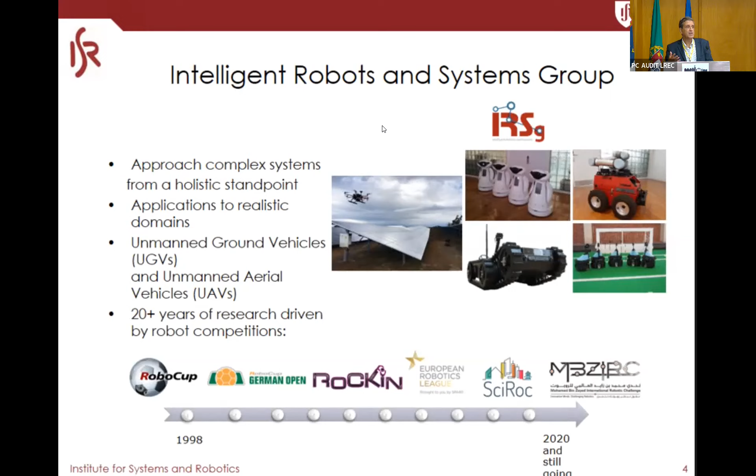Okay, so a brief motivation. Why cooperative heterogeneous robot teams? Well, if we mix UGVs, unmanned ground vehicles, and UAVs, unmanned aerial vehicles, we can bring advantages and cover the disadvantages of each. The UAVs have limited energy, but particularly for surveillance operations, which is what we're talking about here, they can have a much larger overview of the scene and fly around. On the other hand, the UGVs can take closer, more detailed views of things. They have much larger autonomy, and in fact they can even help the UAVs keep their autonomy by recharging them, which is one of the ideas we have been developing.

Also, another thing we have been pursuing is to endow particularly the UGVs with multi-purpose abilities. The idea is that they should be quickly changed in terms of hardware, take advantage of a lot of the software and also of the hardware, and apply them to completely different things, which is hopefully what I'll convince you of today with my presentation.

The competitions, I said that already, so I won't take too long on this slide, but particularly what I'd like to emphasize is that they push the state of the art in particular areas by bringing, instead of having people developing work in particular cases and advancing fundamental research separately, here it's like another paradigm. You go to solve a problem common to everyone, and you compare the different approaches, the pros and cons in several different aspects.

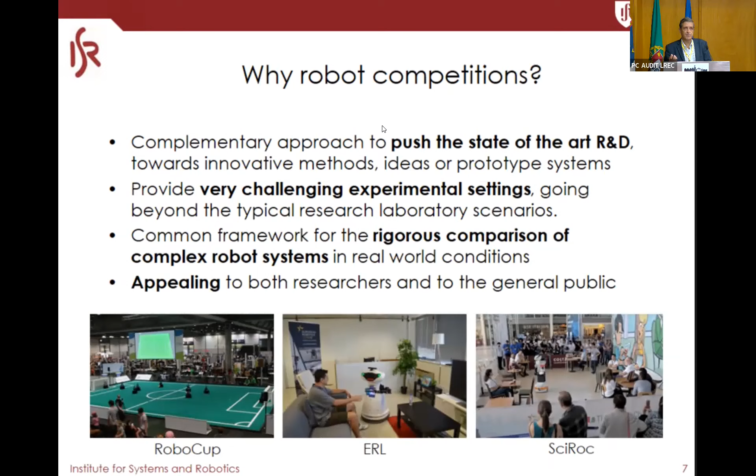And usually, if they are well done, they challenge you to do better every year, and they have very challenging experimental settings which try to be realistic. I'm showing several of them. On the left, it's the typical football field of RoboCup. In the middle, it's an apartment we have at ISR where the robots can evolve and interact with people. And on the right, it's the project finishing as we speak, the European project that, among others, had competitions in big urban areas, shopping centers, museums, where the robots interacted with people who were not engineers or roboticists. So it brings much more realistic challenges.

Speaking of challenges, let me tell you about the two challenges of MBZIRC 2020 that we faced, because then I'll show you our approach, how we tackled them, and how we used the multipurpose mobile manipulator for that. We were teaming with the University of Seville and CATEC, a tech transfer center they have in Seville. They were in charge of the UAVs, we were in charge of the UGVs. Some of these challenges involved the need to cooperate. I'll be showing only our part, but there were parts the UAVs also did.

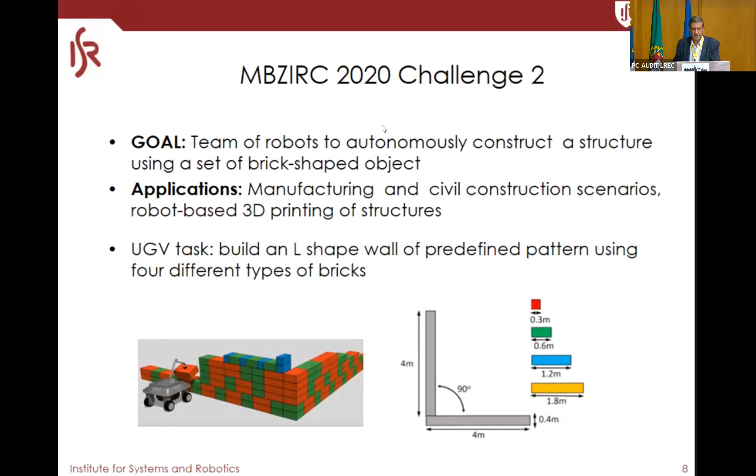In challenge 2, the idea was to build a structure like a wall with a set of bricks of different colors and sizes, and the robots would receive the pattern that had to be built immediately before starting their run. They had to go pick up bricks from piles for each color and size, then put them one by one in the wall according to the pattern. The UGVs were supposed to build part of it, and the UAVs could also help distribute things. No team could do many bricks, so this was really challenging. We did not perform as well in this challenge as in the other, but we could already develop some interesting things which I want to show you.

Our approach consists of putting together navigation, object perception, and object manipulation. You see some pictures of the simulator we developed, then I'll show you real stuff, but these illustrate well what's going on. You see piles of bricks with different colors and sizes. The first thing was to decompose the wall pattern into a sequence of bricks so that the system could run the desired sequence. So we did that, we had that decomposition.

Then we had to do navigation collision-free, because even though there aren't people, there are bricks falling on the ground, even from the previous competitors, which we have to avoid. And of course, then detect the bricks, localize with respect to them, align with them, pick them up, and take them to the wall.

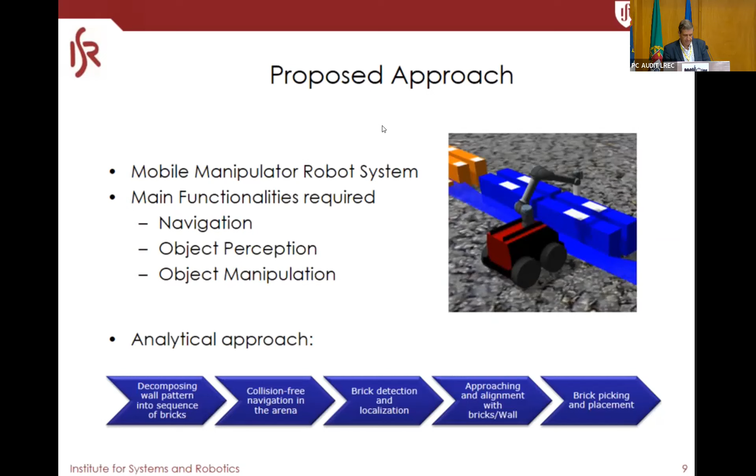Find the place according to the prescribed pattern, and place them there. So it's a pick and place operation, a bit more sophisticated. In challenge 3, what the teams had to do was everything autonomous, no teleoperation, robots are fully autonomous.

To extinguish simulated fires in a building with a tower and a less tall building on the right. They had to find these fires, quite realistic but not real, fortunately, and extinguish them. In fact, to extinguish them they really had to have water, pumps and hoses on board, because there would be meters to measure how much water had been poured in.

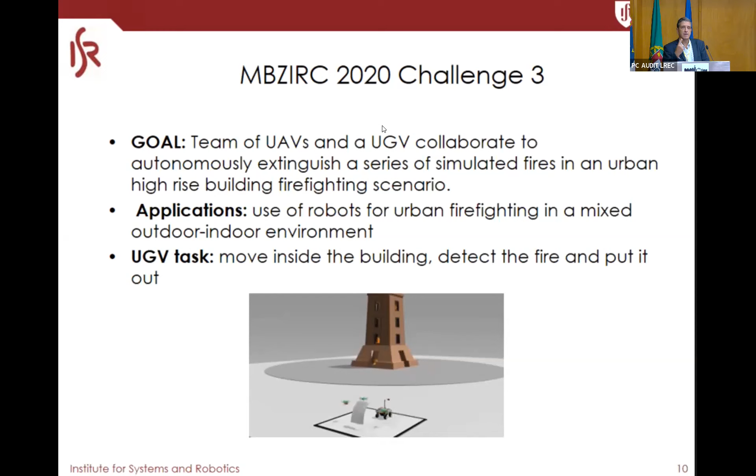To simulate that we were extinguishing the fire. In the particular case of the UGV, you see that tower, the real one, but there's a building on the right which is not there, and the UGV had to go inside it. While the other fires were in the tower, in the windows and inside, in that case all of them were inside the building. There were two possible spots, usually only one was on fire, and we had to find the right one.

Here we had more functionalities, but you can see the mobile manipulator we were using, which I will describe in a few slides, is the same with few modifications. And essentially we have again navigation.

Navigation implies the robot has to localize, but in this case it has to do a part outdoors of the building and another part indoors, so we had to switch.

Then things more specific to the application, like fire detection, aligning with the fire, calculating the distance for the water shooting, doing the water shooting, and planning the motion of the manipulator and of the mobile robot. So again, collision-free navigation, but now with a switch from outdoors to indoors. Then collision-free indoor waypoint navigation, which uses a different method. We will get there. Fire detection and putting out the fire.

So let's focus on the mobile manipulator used for these two challenges, and on particular aspects of it. This is based on an actually quite old mobile robot that we had acquired about 20 years ago from iRobot. Together with a Portuguese SME, a spin-off of ours called IDmind, we modified it thoroughly. So the only things left were the motors, the wheels, and the chassis.

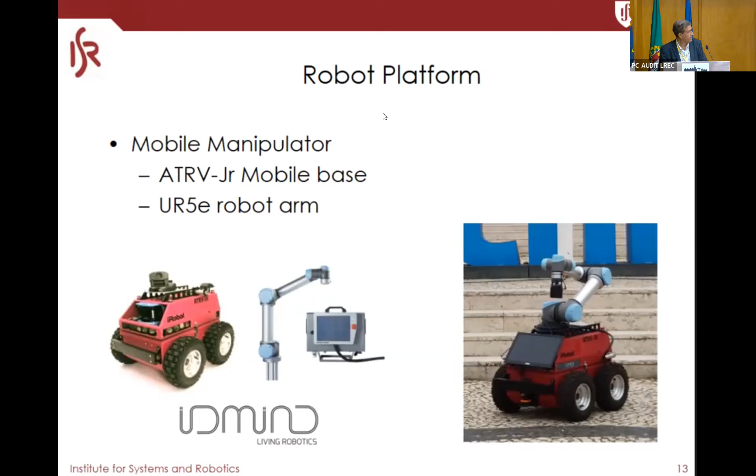I mean, located on top of a table. Here it had to be on top of the robot, and it had to be powered not by AC power but by the batteries of the robot. This was also done by IDmind, and it works flawlessly so far, which is very good.

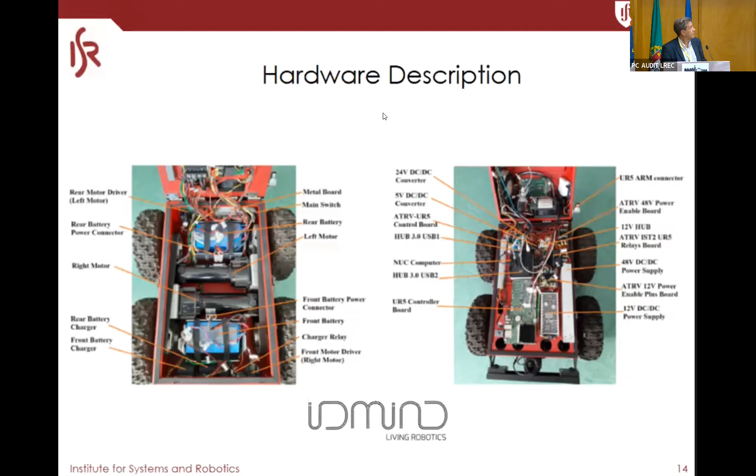I won't go into details, but you can get an idea of what was going on inside the robot. You have a lower part with batteries, the motors, the boards for the motors, and then there's a door that closes on top of that, and you see the rest of the electronics, which includes a CPU, a NUC computer, and several things regarding power conversion and the connection to the manipulator.

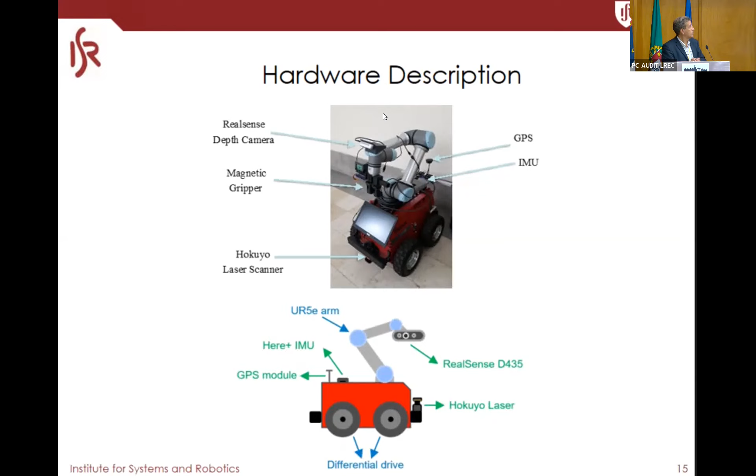Then it has on the front a Hokuyo laser scanner that does scans to determine the presence of obstacles, but also helps in navigation, as we will see. In this particular case, it has a magnetic gripper, though this is one of the things that changes from challenge 2 to 3. Here the magnetic gripper was used to pick up the bricks, because the bricks had a metallic plate that the robot could pick using a magnetic gripper.

Functionally speaking, how do we put all our functionalities together? Essentially, there are 4 modules. Perception, that is very common in robots, as many of you know, others maybe don't, so I'm going into some detail here.

The perception module gets the images from the RGBD camera and the scans from the laser, the 2D LiDAR, and processes them to provide information to the other modules. One important piece of information is the detection of obstacles to avoid them.

Remember I said we were doing collision-free navigation. The other one is also the environment scan, so that, for instance, we can compare what we see with the scan, like the distance to the different walls here, with a map of this room, and this way determine our localization. And also the events that go to the planner, because the planner does motion planning for the arm and for the mobile robot.

But it also does a part which is not planning anymore. It's executing a plan which is going through the states of a state machine to go through different parts of the task. I will show you that.

The navigation module, of course, is quite important. It is the one that moves the vehicle around. So it gets all this information plus GPS and IMU, fuses everything, and we will see, particularly in the final part of the other application, that we have been doing some new stuff on top of the more traditional GPS plus IMU plus odometry, and determines the velocities that go to the wheels of the robot.

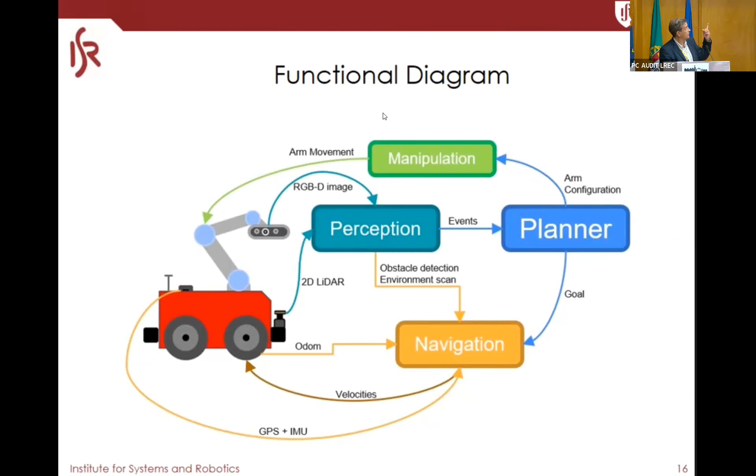Oh, I forgot, the planner does the motion planning for the wheels and for the manipulator, which then determines the motion of the arm, of course.

So here's the state machine I was talking about, which is pretty simple, but it's important to make it work in real time and with all the information we have from the sensors. So essentially for this challenge, if you start there in the begin block, you go down, go to waypoint pile.

And then you go to the left, align with the pile of bricks, pick a brick, the one that you want, of course. So each of those boxes has a lot of processing inside.

Go to the waypoint, which is close to the wall, align with the wall, and place the brick. Again, the waypoint is not predetermined. It has to be determined from the sequence of the pattern of the bricks, and so it changes from iteration to iteration.

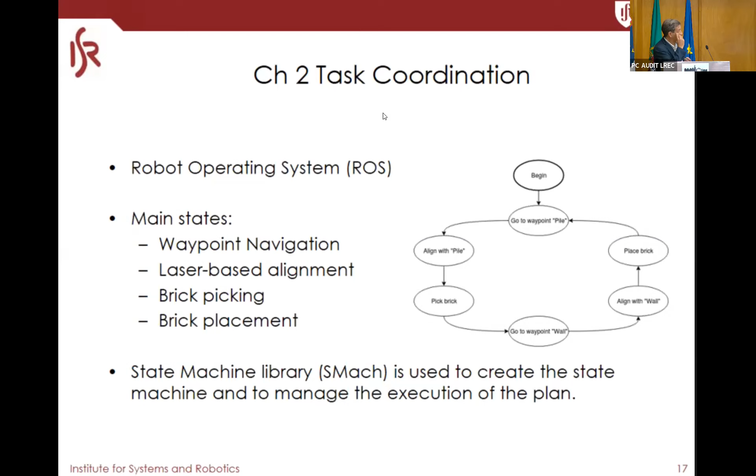So it goes again to the waypoint and continues. We have used the ROS state machine library SMACH to create the state machine and to manage the execution of the plan.

Okay, so focusing on some of the subsystems. This one here, the images are 3 times the actual velocity. This one here shows experiments we did at the campus of IST. We took advantage of the pattern, which allows us to visually check if the robot is following what we want, which, as you probably can guess, is those black lines that it is currently going through.

And what we were using was GPS, fusing it with the inertial measurement unit and with the wheel encoders. And at some point, not in these experiments, but later on, we also used real-time kinematics GPS, RTK GPS, which improves the precision of the GPS. Well, this is a pretty open environment, which makes the life of GPS easier.

And we used an extended Kalman filter to fuse all this information after doing transformation from the coordinates that the GPS gives us, which are latitude, longitude and altitude, into the frame that we were using locally. On the left, you can see evolving over time, together with what's going on in the different images, the estimated path of the robot with the ellipses of uncertainty associated to it.

To be honest, I don't remember off the top of my mind all of those over there, but it's very clear that the blue one is just the GPS data. And then there are different methods where we keep adding odometry and IMU, and you can see, for instance, that there's one which is completely misaligned, which is based only on odometry.

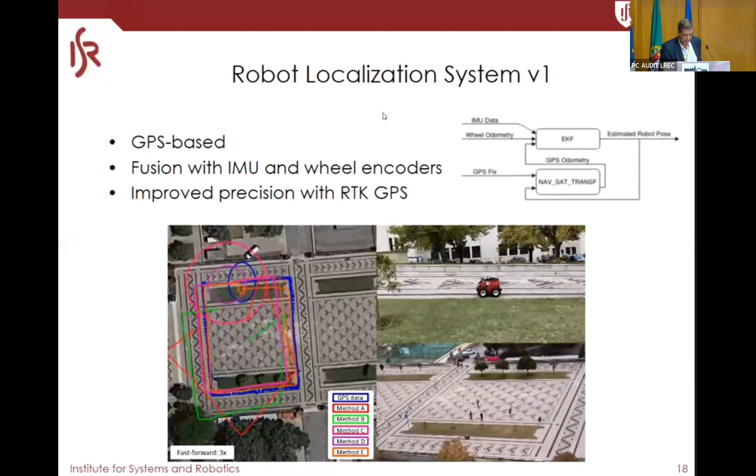So we use this in Abu Dhabi for challenge 2. You can see on the left pictures of the simulator that we were using in Gazebo, showing the cost maps that show the distance to the obstacles so that we avoid them.

And you see the robot moving from the home position. It avoids an obstacle which has fallen from the brick over there quite nicely. It does it a little bit slower to be careful, and then goes ahead. Then, in the final video, it goes to the other side to pick up the bricks.

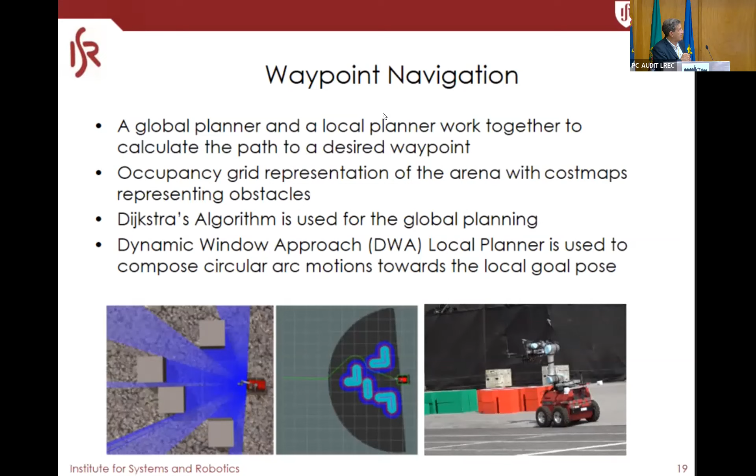Just for the record, we use the global planning method, which is the Dijkstra algorithm, which determines the path, and the dynamic window approach for the local planner, which basically determines straight lines and circular arc motions towards the local goal pose, taking into account the available velocities and the free space in front of the robot.

One thing that we developed on purpose for this, which was quite useful even later on for other applications, was to use the laser to get the robot aligning with the bricks. This is very important because the robot needs to align with the brick so that the camera, the real sense camera on top of the manipulator, can see the brick and determine where it should go to catch it.

There are always small differences from run to run. Essentially, there's a line extraction you see up there from the laser scanner. The robot moves so that it gets at a given distance from the brick and aligned with it. So essentially, it is computing the brick's relative pose, and then it aligns with the brick based on a closed loop controller that uses that information. Afterwards it picks it up, but we have not gotten there yet.

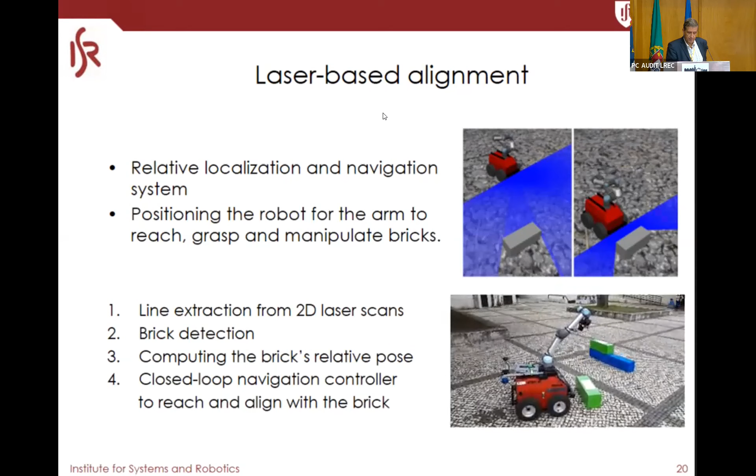And that's the part here now. These are still experiments that we did at IST. I pressed the button because there's a video that should run.

So here we use, as I said, vision. You can see on the right several images which were processed. It is relatively simple because these are just single colored bricks with dimensions that we know a priori. The problem is when we go outside, because there are fluctuations of light, and this causes trouble.

So what you see there is the UGV doing, repeated several times, the operation of finding the place where it should put the brick, which is to the right from this viewpoint, to the right of the red brick and on top of the blue brick. It uses the magnetic gripper to pick up the brick, which makes its life much easier.

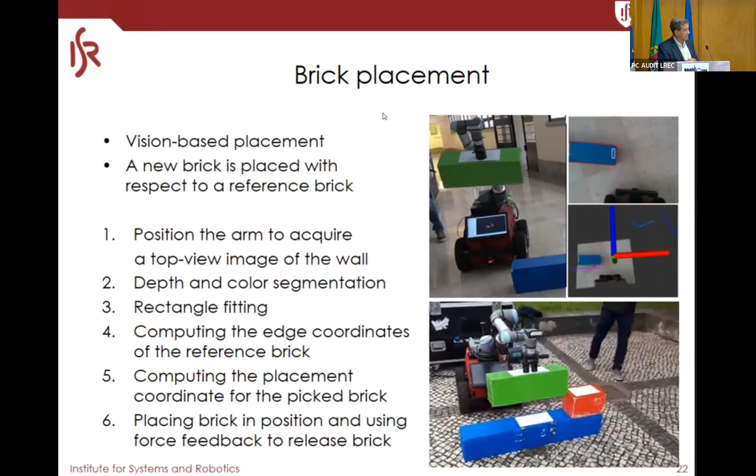But it has all this processing of vision, including edge computation, to know exactly where it should go and pick up the brick, which is very important, particularly for big bricks, because then, as you can see, they can shake a little, they can shake a lot, and fall.

Yeah, we did a lot of simulations. I'm not going to go into too much detail on those; I prefer to show the real stuff. But just for you to see, this is very important to pre-develop the system and at least make sure that it is working from a logical viewpoint.

So you see here the robot doing all the operations: going to the brick, aligning, picking up the brick, going to the other brick where it has to put it on top, aligning, and now putting it there. This was working in simulation, and in reality, it also was doing this.

You can see here, still on our campus, the robot picking up a brick. It is almost aligned already with the others, but still it has to do some alignment with the place where it is going to put it, and then it puts it there.

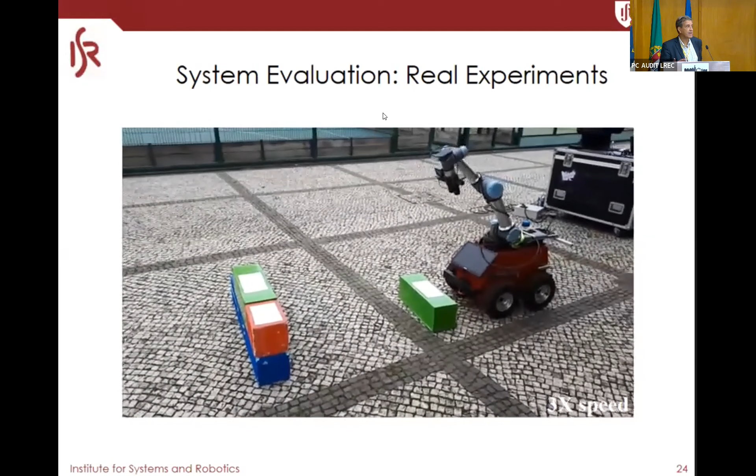This involves several things which are very important in a robotic system, and I wanted to emphasize that. You have to do each of these operations, you have to put them together, you have to react to events, and even in some cases, if there's a failure, react and try again or do something else. All of this should be part of the system.

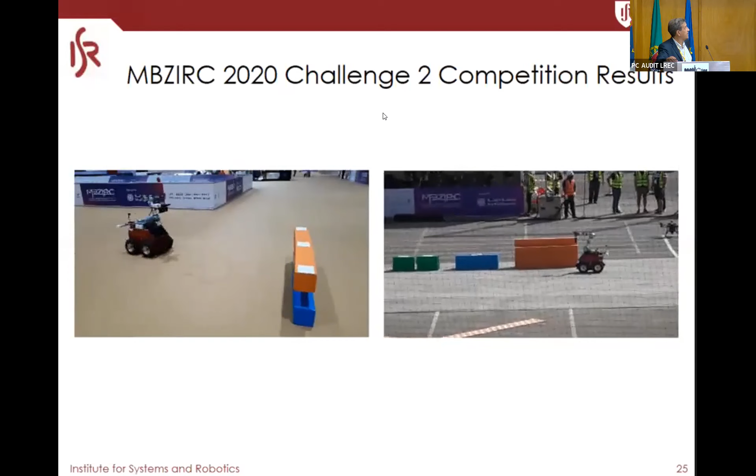We did this also in Abu Dhabi. So this is indoors, a much larger space and a much larger brick.

And then the place where it had to be put is hidden now, but it's on the left there. And on the right, you can see it in the real scene. I'm not sure if it shows there, it will show later.

We had troubles in the real thing because of what I said before. The light was, we could not train it before, and the light there was creating troubles because it could pick up the brick, but not so well like here, not in the middle. And as you will see here or later, then the brick falls because of that.

So that was a thing that was not successful. There are failures in robot systems. But here, as you can see, it could do it pretty well. So the problem was a perception problem.

Well, yeah, exactly.

Okay, challenge 3, other systems, other types of composing them. Particularly here, what was somehow more interesting was the fact that we had to mix outdoor and indoor navigation.

And so that map you see there was built using a SLAM algorithm and shows an external part and an internal part. Outdoors, we could use GPS, IMU as before, and odometry. Indoors, we could use a map, and first of all, we could not use GPS, but the map was also very reliable. We were very used to doing that in other applications, as I showed you in the domestic and hospital environments. And so we did that.

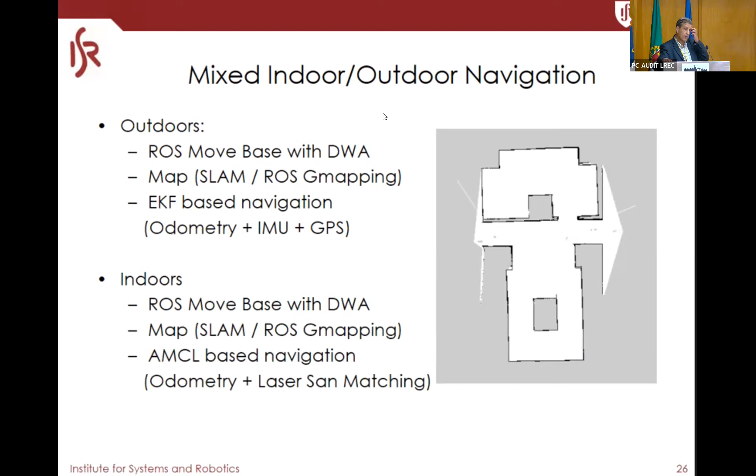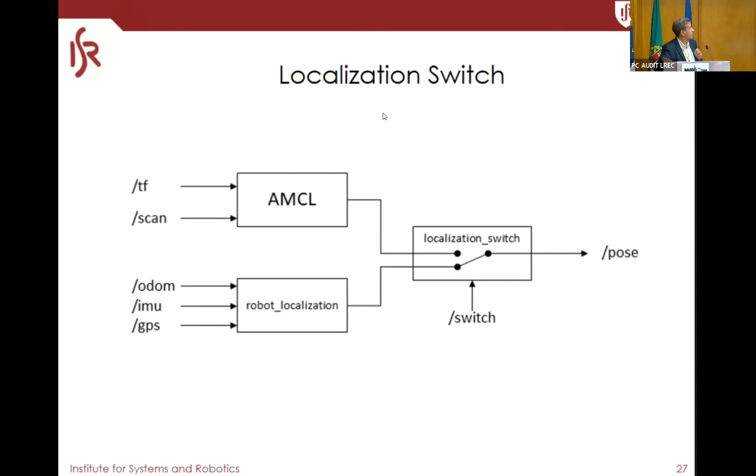But of course, this poses a problem, which is when you move from one environment to the other, you have to make sure you detect that so that you switch the localization. Then this switch provides the pose either from adaptive Monte Carlo localization, AMCL, or from this other package, robot localization, which is based on a Kalman filter and fuses odometry, IMU, and GPS.

Then particular things of this challenge. We had to do a fire detector, and we used a very popular machine learning algorithm, which is Tiny YOLO, using an RGB image and also a thermal camera, because there were two points.

One was the simulated fire. That one is the type of fire that was used in Abu Dhabi. We bought one and were training it in our environment. In fact, the algorithm was trained with real fires and with this type of simulated fire. And so it worked well because the fire looks very realistic to the computer, to the machine as well.

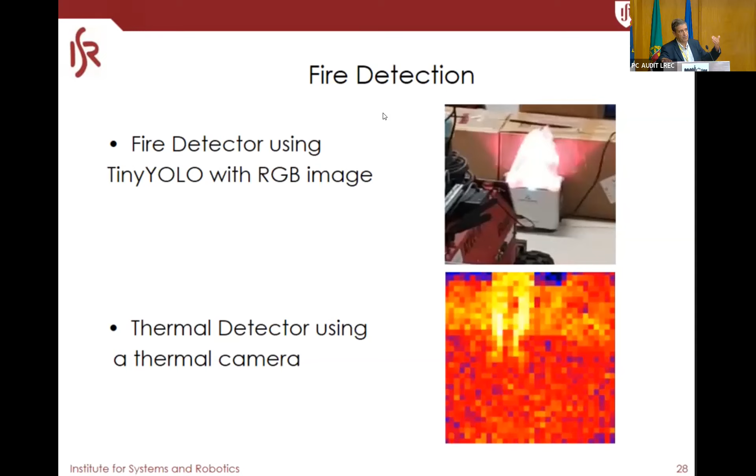And then we also had, so first detecting the spot, but then we had to determine the hotter spot with a thermal detector, because this was important, as we will see, to shoot the water at the right place and really fill the deposit that it was desired.

This was very useful to do the alignment also here with the place on top of which the fire, the simulated fire, is. And then also a simple control aspect to control the distance to the wall compared with the distance we want. We want to get a given distance so that it makes our life easier to do the computations of the angle to do the shooting.

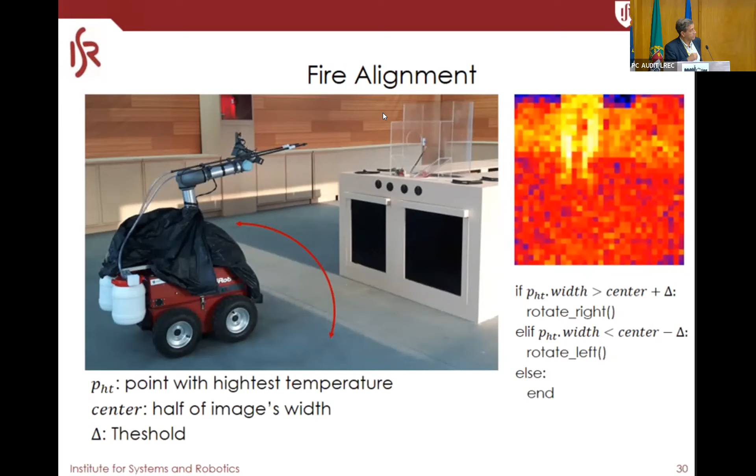We knew the calibration depending on the angle where the water would be going at a given distance. And also we had, of course, to do this alignment, in this case closing the loop with a thermal camera, so that we could point it both in terms of height and also on the lateral dimension, to point it at the center of the fire.

We had an algorithm which one of the students had developed before for other purposes in his master thesis, that we readapted here. So basically, the robot goes to a circle around the point where the target is, in this case the fire. This is a general thing.

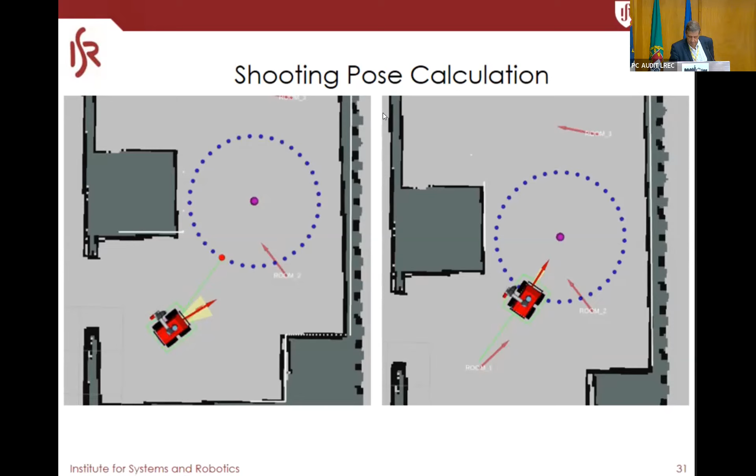And this point on the circle depends on where the robot comes from. Particularly if it comes in this case from the left of the room, this is actually an image with the scan of the actual room. It finds a point over the circle, and then it aligns in the direction of the radius towards the point. And the radius is that distance I told you about.

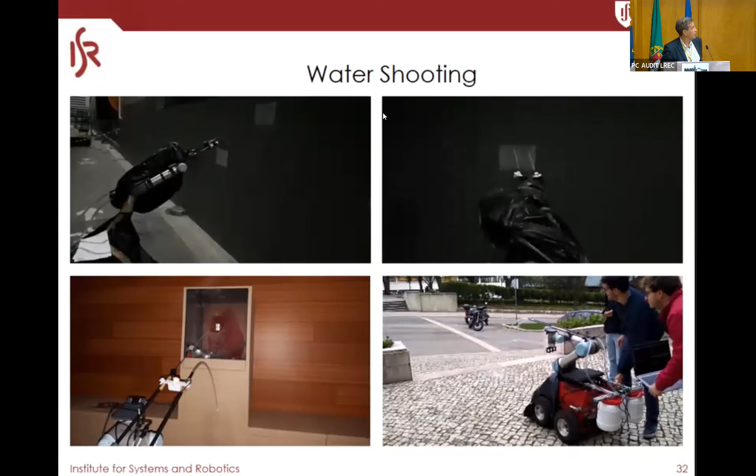Well, this is just to show you the different ways of the water shooting working, sometimes better than others. It was on purpose to show you the system working. On the top it's not so easy, but down here you can see it.

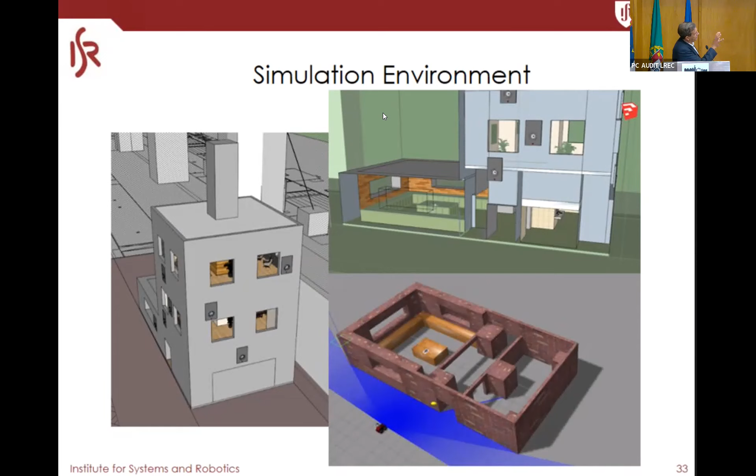Then we also did a very thorough simulation of the environment. Here now you can see the high tower, and on the well, on the left of it, the building, which is now on the bottom right in more detail. That brown part on the left is where the fires are that you saw in the previous pictures.

And then we had the task. The task for challenge 3 was again a state machine where it goes to the door of the place where the fires are. It switches to indoors localization, and then it starts checking if it detects on the first possible point for the fire, a fire.

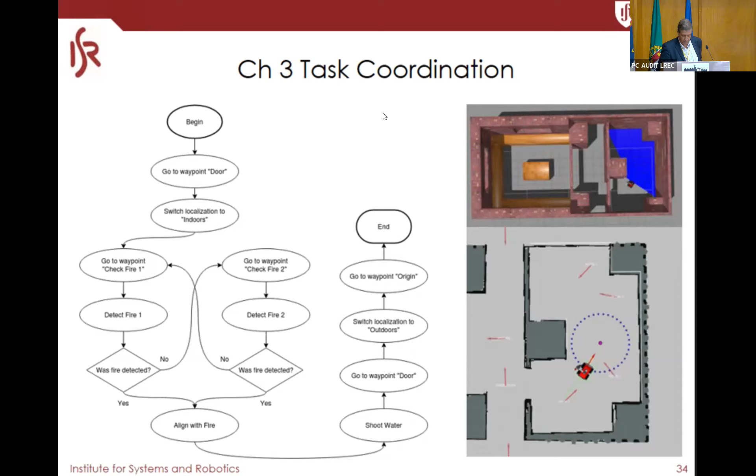If it detects it, it aligns with the fire, shoots the water, goes to the door, leaves, and that's it. If it doesn't, it tries the second point, because there may be two possible ones. And also, if for some reason it does not detect either one, there should be one, it knows, so it keeps trying. It's like recovering from a potential failure.

And here we can see how we checked again from a logical viewpoint if the system was working. This is a simulation, but you can see the arrows show the estimate of the localization of the robot. You can see those blue zones are the cost maps around the walls of the place where the robot is entering.

This is in our lab. This is not the real thing in Abu Dhabi. And he has those waypoints on the right, the big arrows, where he wants to go. He already starts watching the place where the fire is. It showed there for a little bit because it saw the device there.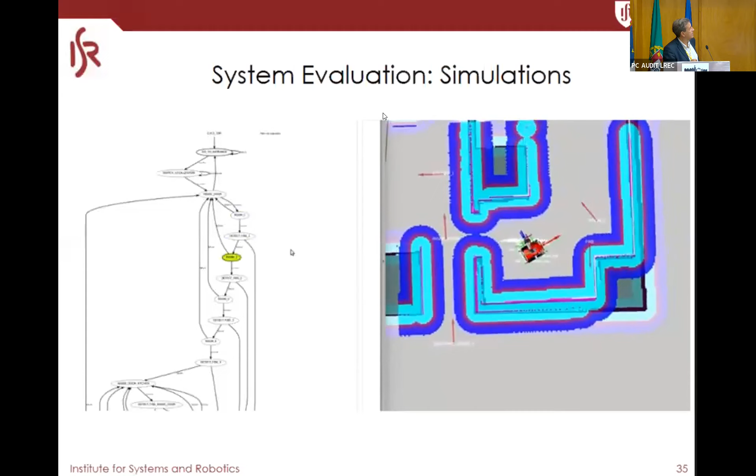It aligns. Now it goes on the top of the circle and aligns with the fire. On the left it's not easy to see, but you can see the state machine and the different states evolving and going through them as it goes. So all this we could check if it was doing right.

You see now he detected the fire. He knows it should go on a circle with that radius of distance with respect to it. He's trying to do the motion, which is difficult because it has obstacles nearby, and it aligns with the fire and shoots, well, not here, but it shoots the water.

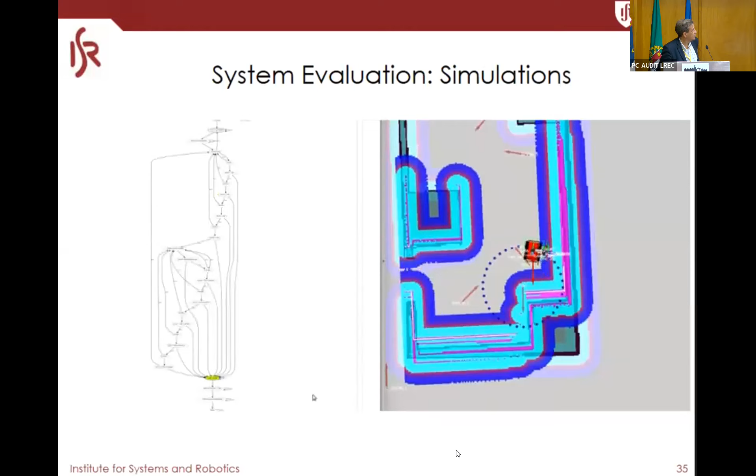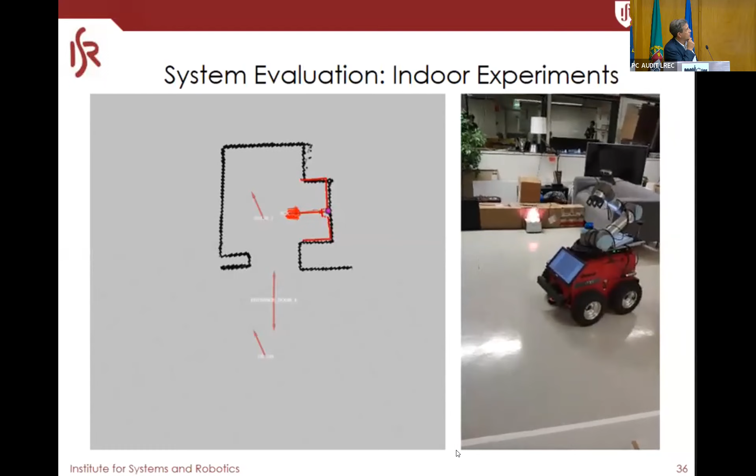And we simulated going from outside to inside. So now he's using already, oh, he's jumping the video. You see the simulated fire. He is going to a waypoint, then he's going to search for the fire. He sees the fire, and he goes too close, so then he comes back to recover that distance.

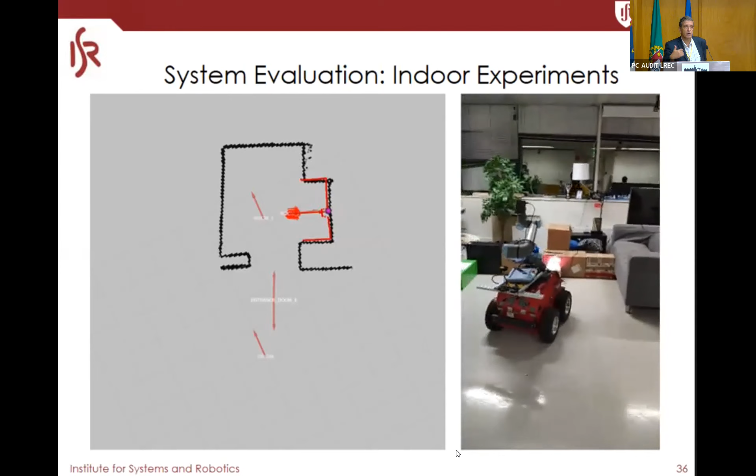So all of these things are based on closed loop information, event detection, measuring distances, aligning angles, which is very important if you really want the system to be dependable and work, and not just be pre-programmed, which might be problematic.

Oh, that's really strange. Okay, that's the scenario. They built an impressive scenario in Abu Dhabi with the big tower, real stuff in a big stadium, and on the right, the building.

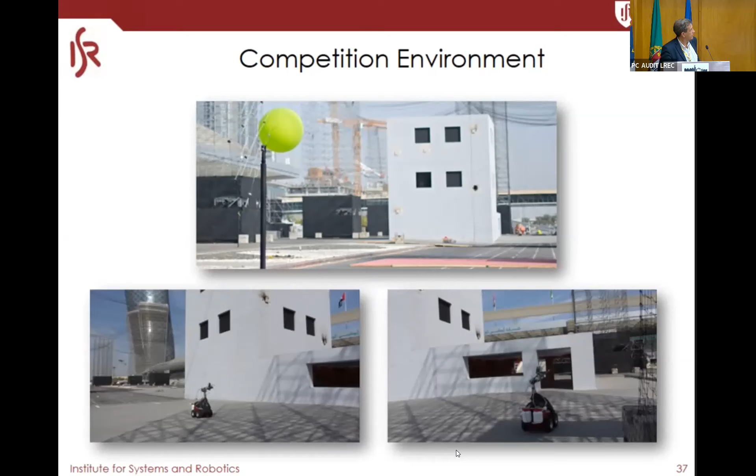This is our robot actually evolving there, protected because the water could pour on top of the electronics. So it looks bad, but it's really necessary.

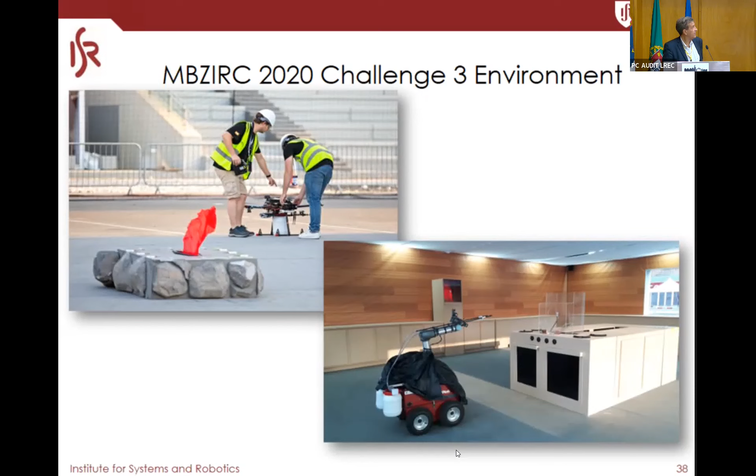Also, you can see on the left one of the simulated fires that had to be put out with a blanket. Could be with a UGV, but we decided to do it with UAVs, and actually Seville did that part quite well. And then on the right, you can see again the image of the place.

So I'll show you a video, which actually I won't talk much because it is self-explanatory, but here and there I'll point out, which shows you essentially many of the things I showed you before and what we did also there in Abu Dhabi, and summarizes the different achievements of this multi-purpose mobile manipulator.

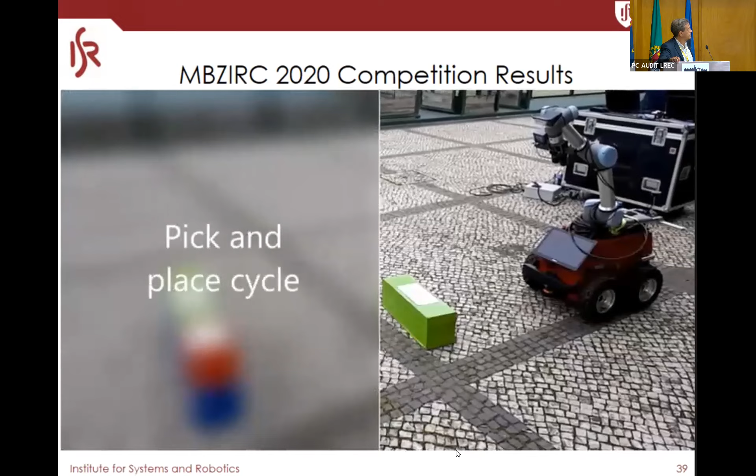So this is what we call the pick and place cycle, and all the different steps I told you. So look at the captions at the bottom.

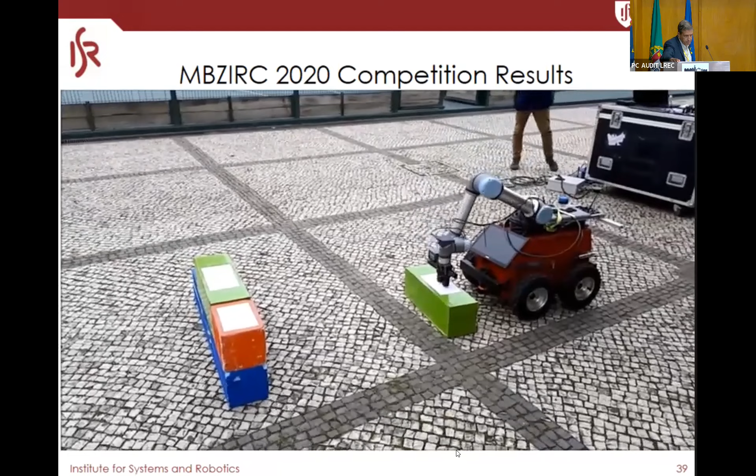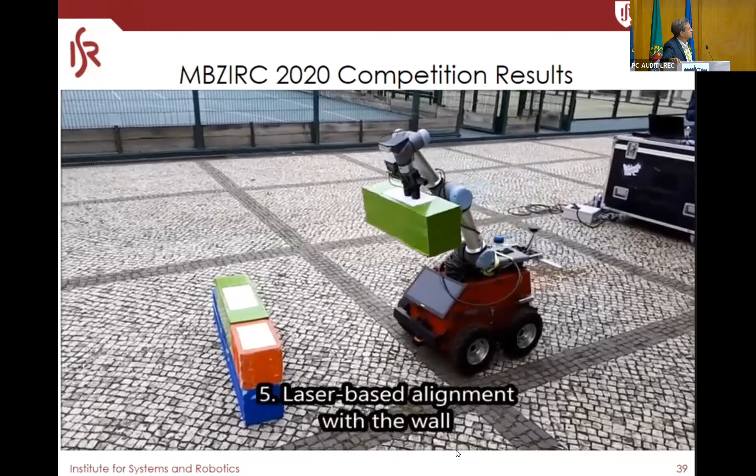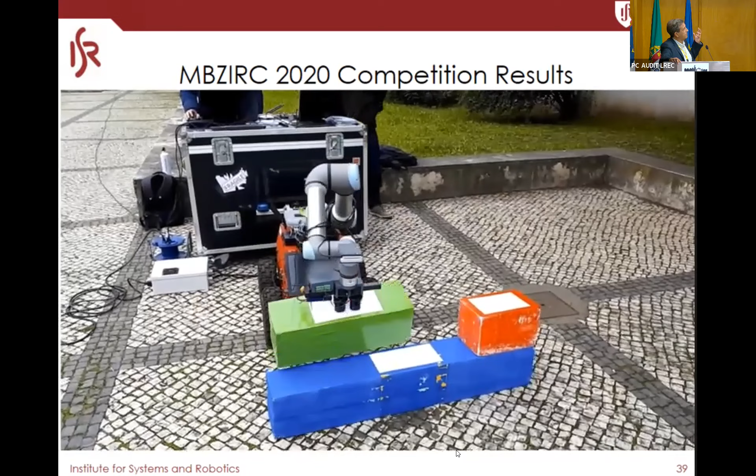So now it goes up. He always goes up, not just to get some space, but also to have an overview of the scene, to be easier to determine the different things it needs, like where is the brick it should pick, where is the place where it should put it. That's why the manipulator goes up to give this view to the RGBD camera.

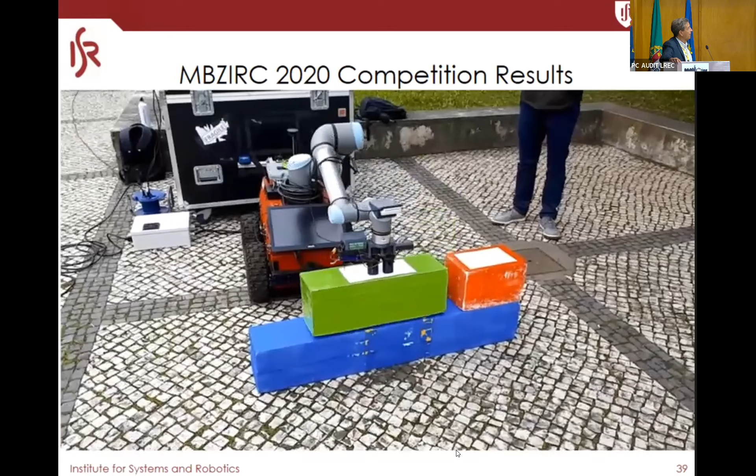Okay, so I'll just move this one. You have seen already. Well, I would move if I could, but I don't think I can from here. No problem.

So he's doing the same now in this other environment, already at Abu Dhabi, but here just for training.

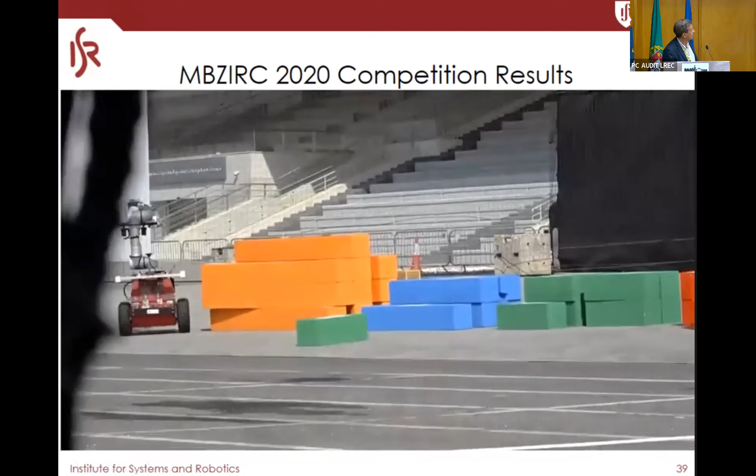Is there a way I can speed this up? I mean, moving in the video, I don't think so. Ah, yes, I was missing that. Okay, so now you can see it. We saw part of it, but we should see a little bit more.

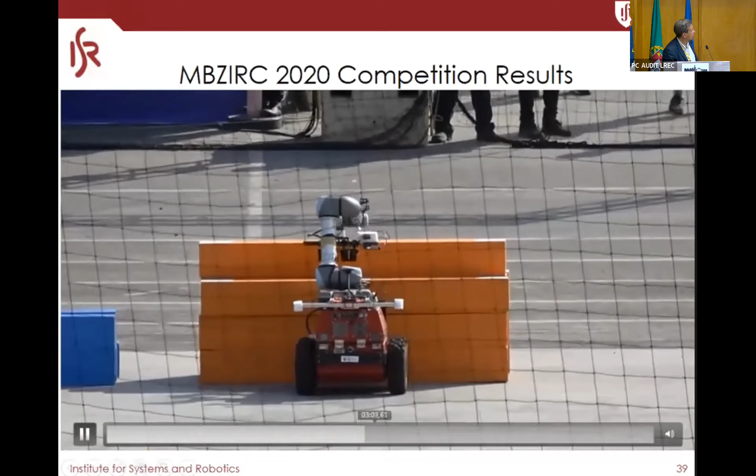So it actually did that failure that you saw before, but then it tries again. It was slightly more successful, but then lost it. You can see what happens when it turns, because instead of being exactly in the middle of the brick, the grasping was made on the sides. That's why it's more difficult to pick it up.

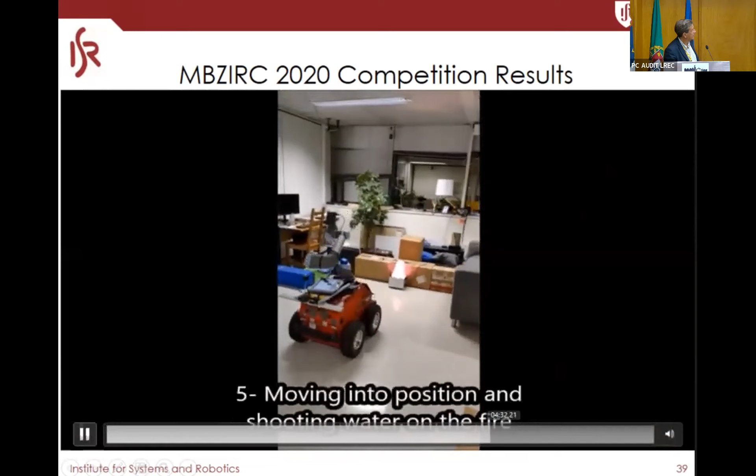Okay, so then this is the trials we did at our place inside, but emulating being outdoors. And now I wanted to show you this part you saw already: detecting the fire, moving into position. Now it's better than before, so maybe we should see this.

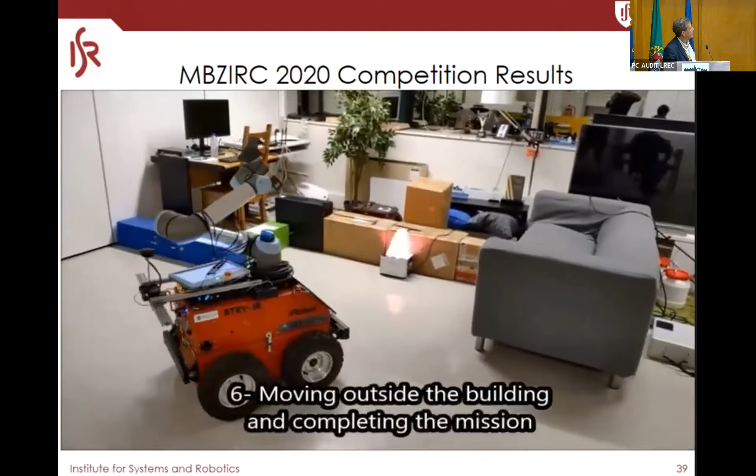And shooting the water on the fire. It doesn't shoot the water here, of course, but it gets back and then it moves outside the building and completes the mission. Now we did this, and this is what you did not see before, in the competition setup.

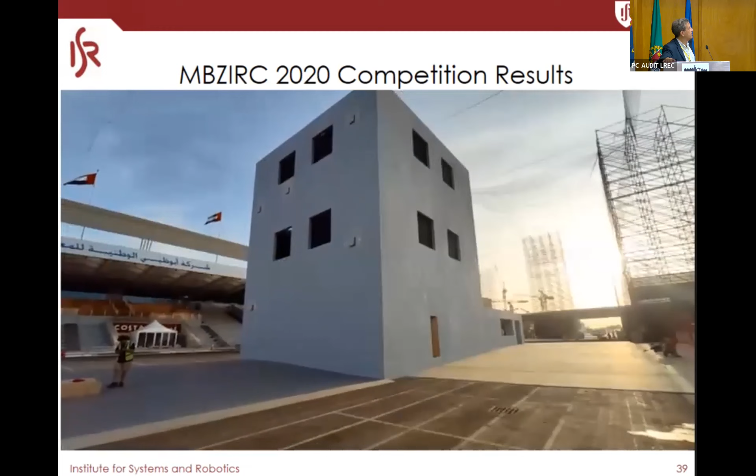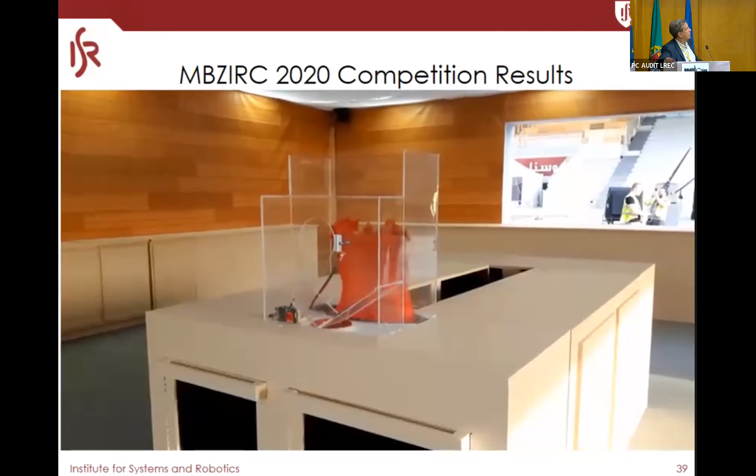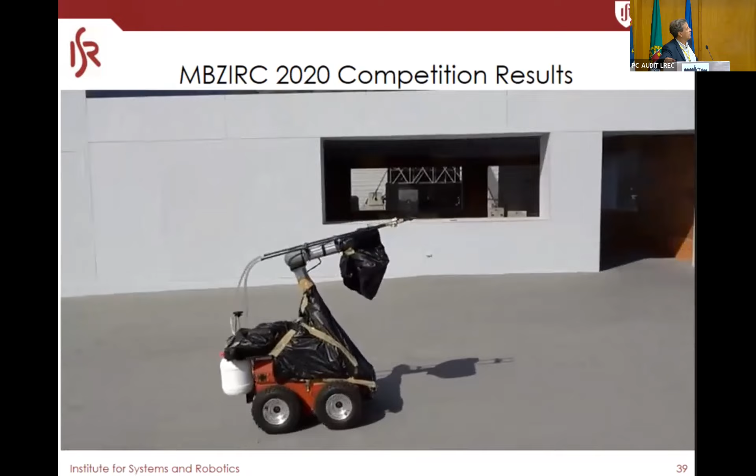These are the two points of fire, one on the right, one on the left. So the two possible fires that we had to go close to. It first does the navigation outdoors, detects when it is in front of the door, and then turns. And when it crosses the door, it detects it is inside and switches to the Monte Carlo localization method.

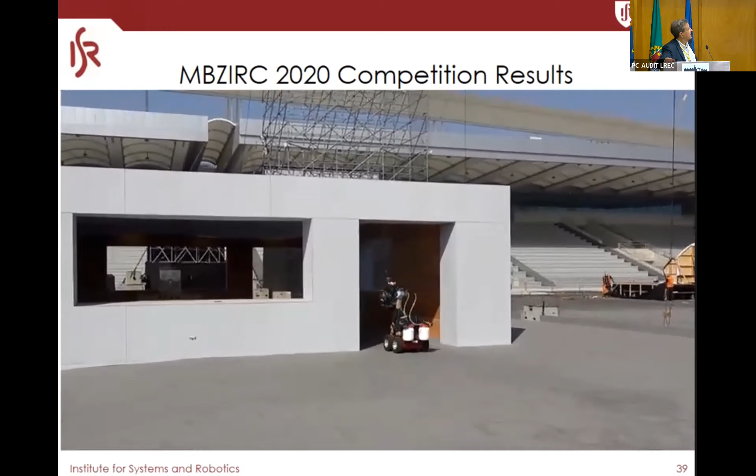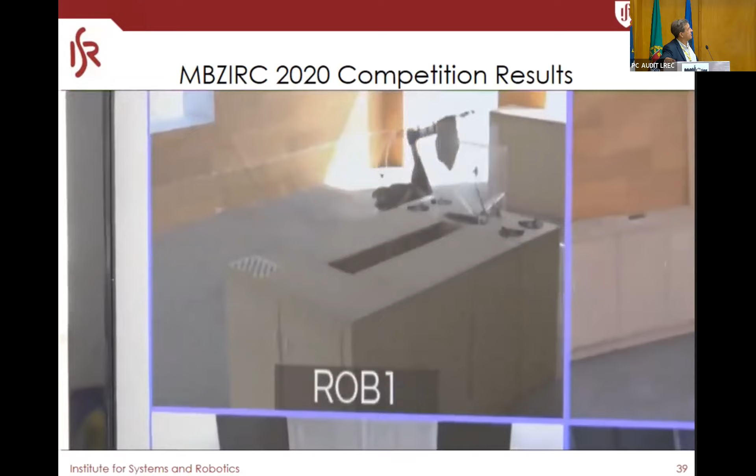So this is actual speed in this case. And now we could not be there, but we could see with the cameras that were installed by the organization inside. You can see it going to the first waypoint to check if there's a fire there. You can see there is no fire there, so it will detect that with the thermal camera.

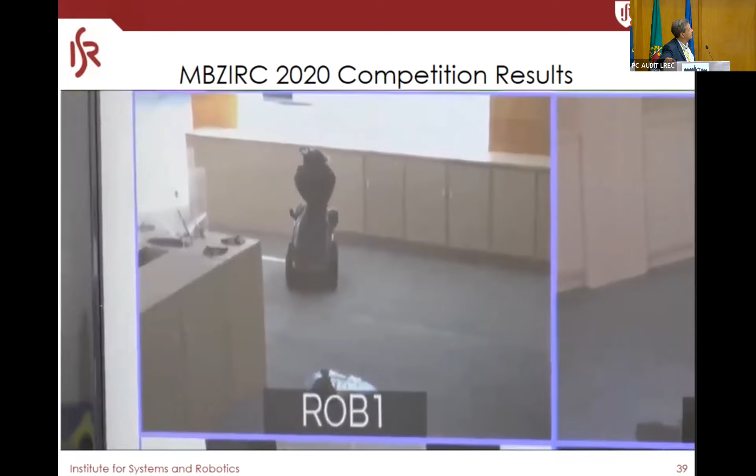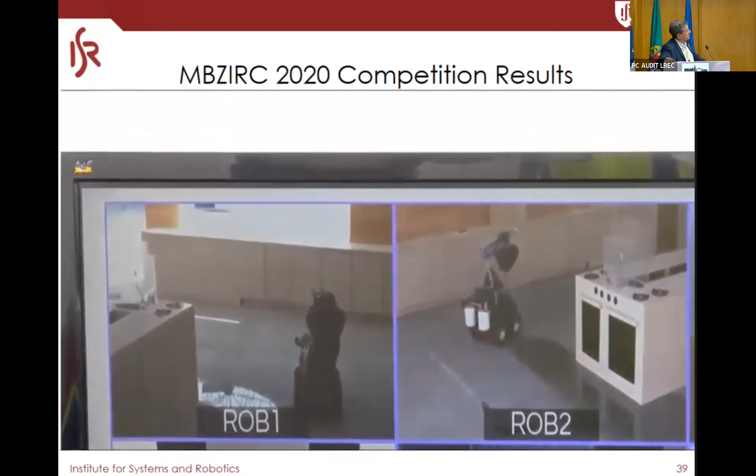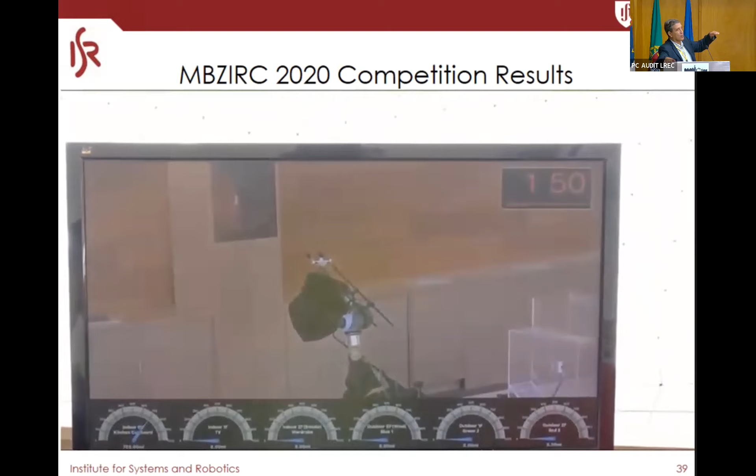And then because of that, it goes to the second one. It finds a fire and it will throw the water, which we can see in the meters at the bottom being filled, especially this one on the left. We actually did this motion also to compensate for small failures that we could have. And we won challenge 3, so that was very successful.

Okay, so moving to the... how long do I have? Okay.

We actually, when we engaged into that with Seville, wanted to go for a European project we had in mind. We were developing the technologies because we like to be in that competition, and it went pretty well. But we wanted to apply it to an even more realistic scenario, which in this case was the inspection and maintenance of solar energy systems. This was a DURABLE project, which also concerned wind towers and wind energy, but we focused only on the solar part.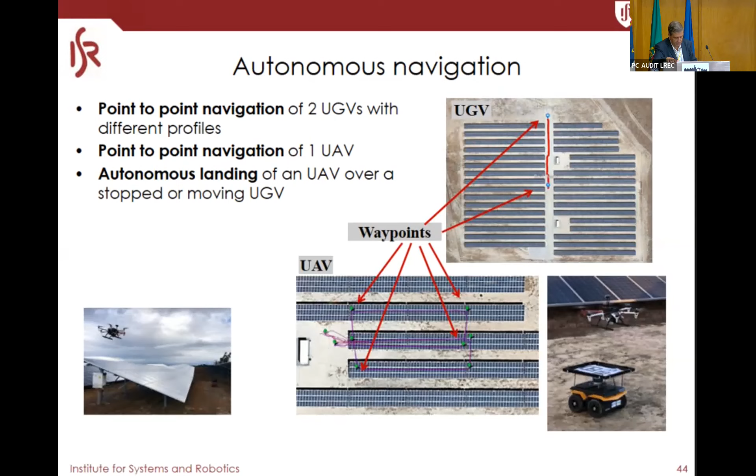UGVs were using GPS plus IMU plus odometry plus something else, which I'll tell you in a minute, which was one of our innovations here.

That something else was to take advantage of scanning. So the map we did inside the building in Abu Dhabi, we could do a map here with the panels. In fact, we acquired a 3D LiDAR Velodyne, which is quite popular these days and reasonably priced for the quality it has. We assembled it on the other UGV. We made maps of the plant, and then used that on top of GPS plus IMU plus odometry to improve the localization of the system.

This matters particularly when robots are in the middle of the solar panels, because there you can lose some GPS satellites since these are metallic structures, which is a well-known problem. You can see that we improved the mean square error, the accuracy of our localization, as we added more components.

We even did some further work and are preparing a paper on doing this matching. As you can imagine, this is a huge area, so we have to limit the area we match with. It's very symmetric, which is a problem, but given that we have GPS and odometry, the two together work well.

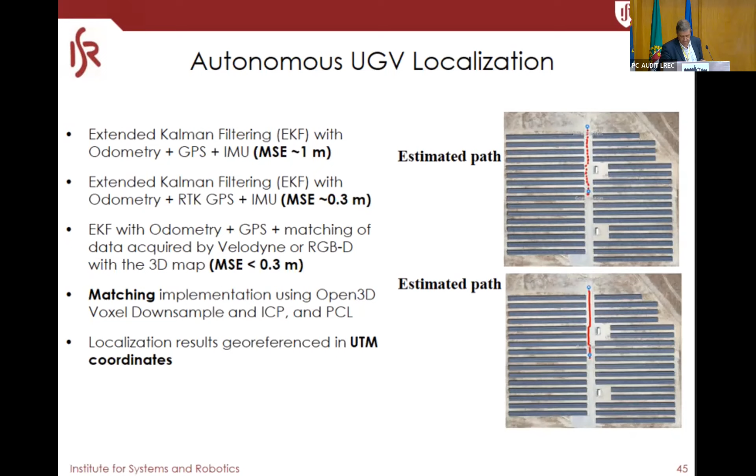But even so, there are a lot of points in the point clouds to match using algorithms like ICP. So we did segmentation, which groups the points into ground, panels, and pillars of the panels, and then we match between these groups rather than all the points, which simplifies the algorithm's computation time.

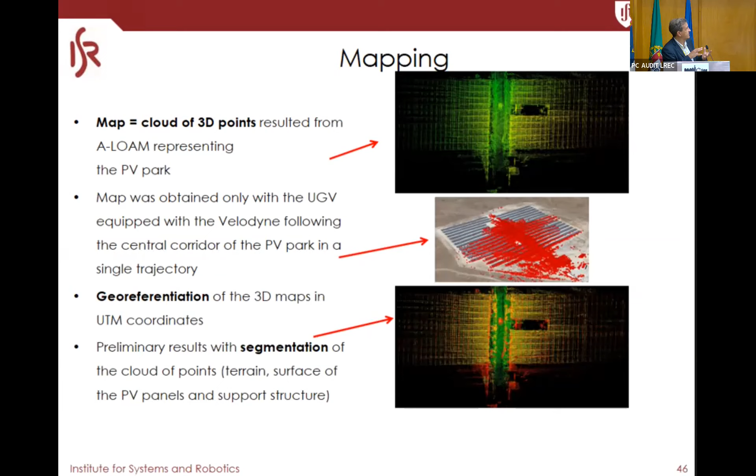We also did georeferencing, meaning we can put our maps in UTM coordinates, so we can see, using Google Maps, exactly where the robot was in reality.

We acquired thermal camera data that another partner then processed to find defects. These are images both from the top by the UAV and from the ground with the UGV and the camera on the manipulator. We also synchronized this view so the UGV could go to a place where the UAV had detected a defect.

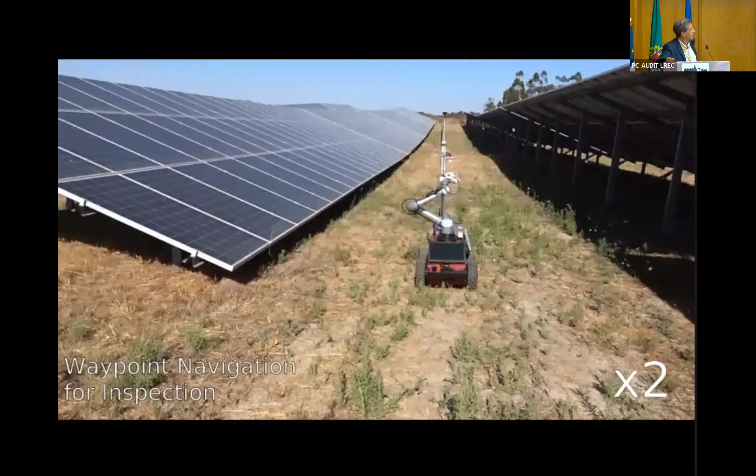All these steps we did in that direction are not fully integrated, and it's only the robotics part, not even the processing part, shown in this video.

In this next part I'll add a bit more commentary. For instance, here the footage is shown at twice the speed. The robot is moving outside doing waypoint navigation, in this case with GPS, odometry, and IMU. It's also moving the arm, because the arm will be used to do the inspection of the panels, as we will see.

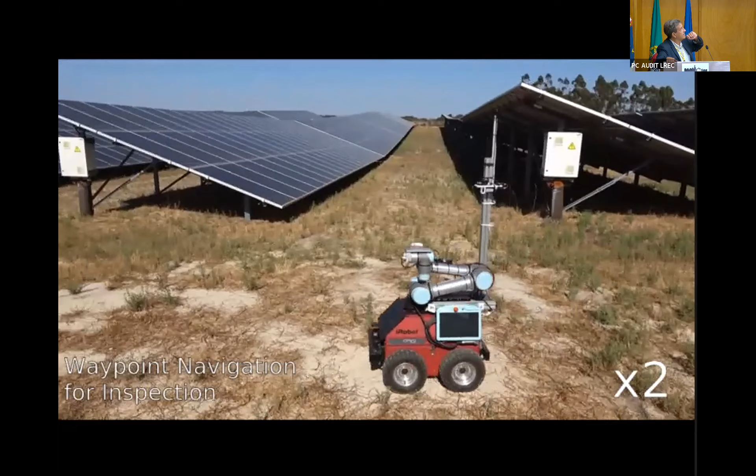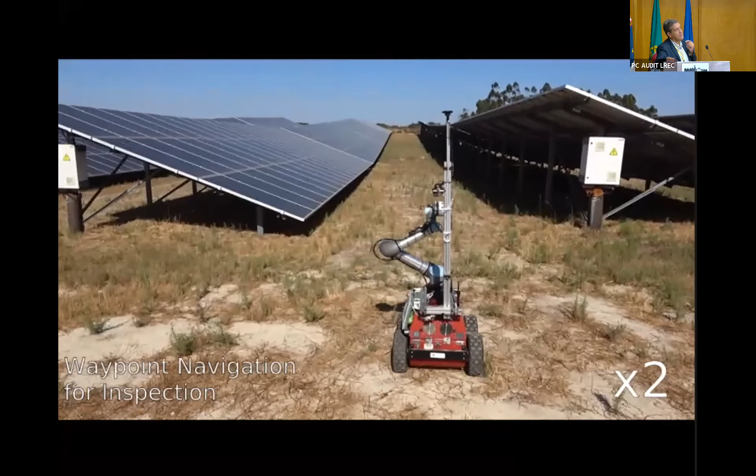The tower here is the GPS, and we installed it a bit higher specifically to see the RTK antenna, which is located in a nearby building, in order to avoid the influence of the panels as much as possible.

So as you can see, the terrain is difficult, it's bumpy, it's grassy. The robot still manages it quite well. Then it gets to places - we cut it for the sake of being quick, but it really does everything together in a row. So it goes to a waypoint, it does this predetermined motion of the arm, which aligns the camera with the panel and gets the images that then are going to be processed.

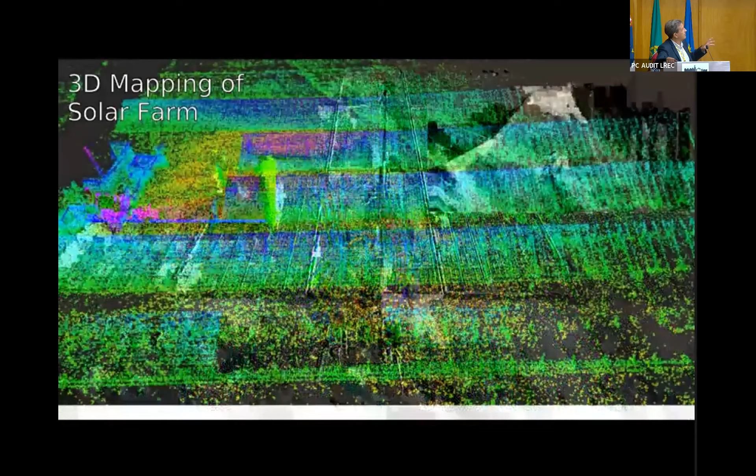This is the other robot doing the map. As it progresses, the map is being built. And then next you see the final map, just taken from the center. Unfortunately, the video is having some glitches, but just taken from the center corridor of the farm. So it's quite impressive how far the Velodyne can see. Then, in later iterations, we did some turns to complete the map.

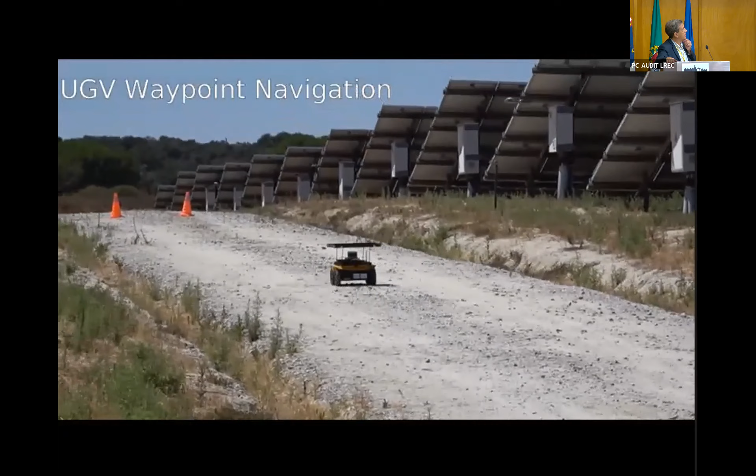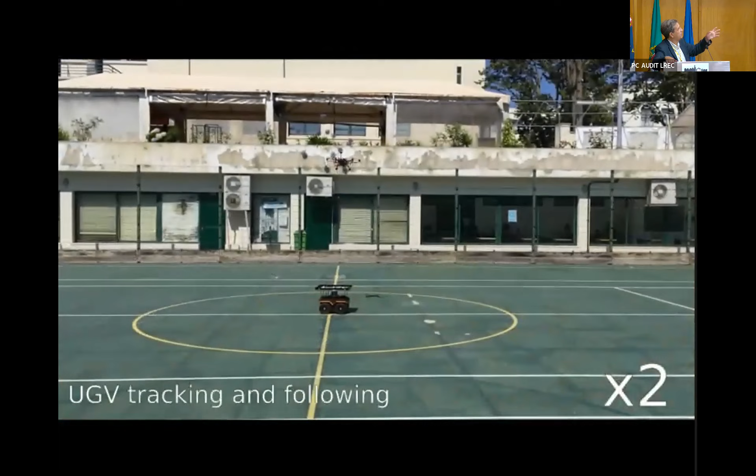And this is one of the nice things. So the UAV, with a camera checking a QR code, an Aruco pattern on top of the UGV, landing on it, or the UGV landing on it, both when it is stopped and when it is moving. And this is what is necessary so that then, if we install a charging station on top of the UGV, it can recharge.

In fact, we did some further experiments later on, even closer to now, at IST. And here the algorithm was a bit more fine-tuned, and you see the UAV tracking, using vision, tracking the UGV, including the orientation. So it's always aligned and ready to land in the right orientation. And it does it quite well.

And finally, I think it's the final part.

We also did something that looks similar, but then completely different. The UAV on top is tracking the UGV on the bottom, but now, because the UGV is sending it by wireless communication the waypoints, the UAV goes to the same waypoints.

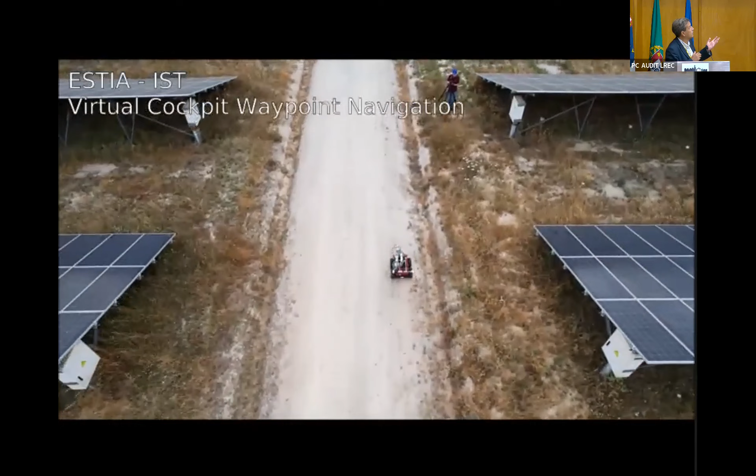The last part looks the same, but in fact the robot is being supervised or remotely controlled from France by a virtual cockpit that was developed by our colleagues at Estia.

Okay, so to finalize, in a simple slide to try to say a few things: we did some demonstrations of the ability of using multi-purpose UGVs and teaming up, in some cases, with UAVs, to do surveillance operations that require teams.

We are on top of it, particularly now that the projects are over, keep doing the practical applications but trying to formalize some of these aspects. For instance, this is something we have been doing over the years in several theses. We developed stochastic Petri nets models to model the team tasks, to analyze their performance, and to determine policies that maximize long-term average reward. We even developed a tool with MathWorks, which is now a toolbox in MATLAB to do this kind of stuff, and which then compiles into ROS executable code.

And there are 2 ongoing PhDs which are trying to formalize 2 parts of what you saw, particularly in this last application: the cooperative situational awareness, that is, the different robots building the maps and the location of the other robots, of the plant, and so on; and how to use an optimal solution for the cooperative surveillance, that is, to know where the robots should be at a given time, to do inspection, to recharge, and keep the full team flying.